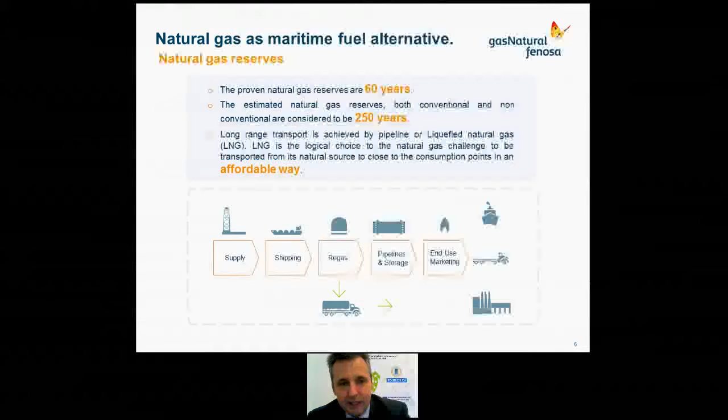So the first thing we want to address when one looks to consider fuels is: is this a fuel that has a long life? Is it a fuel that's going to be there to serve the investments that have to be made? Because when you're looking in the maritime sector, a boat has a long life of 30-40 years, and if we say to a boat owner the boat should be fueled by LNG or by natural gas or by compressed natural gas, the question he will ask is, well, will gas be available? I have a living to make, and I have to make sure that I can operate my boat. And the port infrastructures will say the same. Let's look at the case for natural gas.

There are today proven reserves of over 60 years, and many people believe that these reserves will go out beyond 250 years. And this is because of what people call the shale gas revolution, which many of you would have heard of in the USA, where people have found a way of extracting gas from shale formations where you blast open the rocks and you extract the gas from the pores. But there is a glut and a considerable quantity of gas.

When I was a youngster, people used to say that natural gas had the least reserves of all the fossil fuels. Today, that is not the case, and many believe there is far more natural gas available than petroleum. Also, the gas is widely available around the world, and we move it around, as I said before, in the form of liquefied natural gas, which is LNG. It is a way of moving the gas across the continents. And today, the full infrastructure exists for this movement. So, as a coming point to this course, natural gas is available and will continue to be available as a fuel.

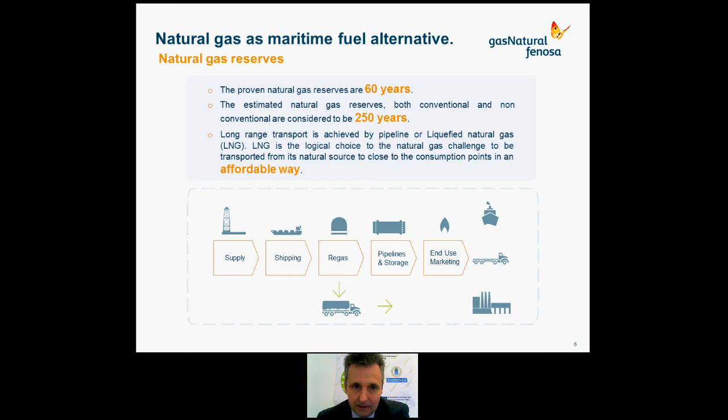So the first thing to point out is that natural gas from one country may well differ from natural gas from another country. And when you consider its use as a fuel, this is a concept that's slightly different to other fuels. Engine manufacturers are known to like standardized products. They know that a diesel, a petrol, a medium fuel oil, a heavy fuel oil has a minimum specification. This question is a bit more vague in the world of natural gas, and we tend to define it looking at factors called Wobbe index, which is really a calorific value of a gas, and a methane number, which, to give an understanding, is like the octane number of a fuel, and this varies.

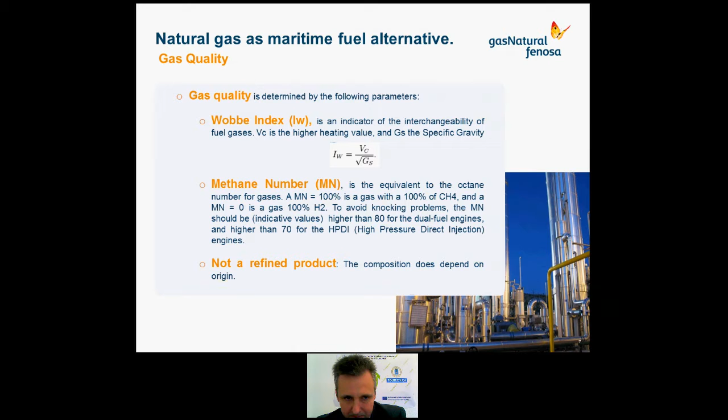Now, in the marine sector, everyone talks about LNG, which is liquefied natural gas. And all that we're talking about with liquefied natural gas is that 1 cubic meter of LNG is equivalent to just slightly less than 600 cubic meters of natural gas at atmospheric pressure. LNG is the most efficient way of maximizing the energy content of the gas in a fixed size container.

So in fuel transport, where you want to get as much energy content of the fuel within a confined volume, LNG represents the way to go forward. But it has its drawbacks, or its complications. First of all, it's a colourless, transparent, odourless liquid. So if there is a leak of LNG, you will not smell it.

Natural gas has no smell, but the gas that you receive in your houses is actually odorized with a sulfur-containing element. But in LNG, there is no odor added to the gas, so therefore you will not smell it. It's also a cryogenic liquid, and a cryogenic liquid brings a sort of complication and a certain set of risks that, when one handles it, you have to be aware of and take into consideration in the design of the infrastructures and installations.

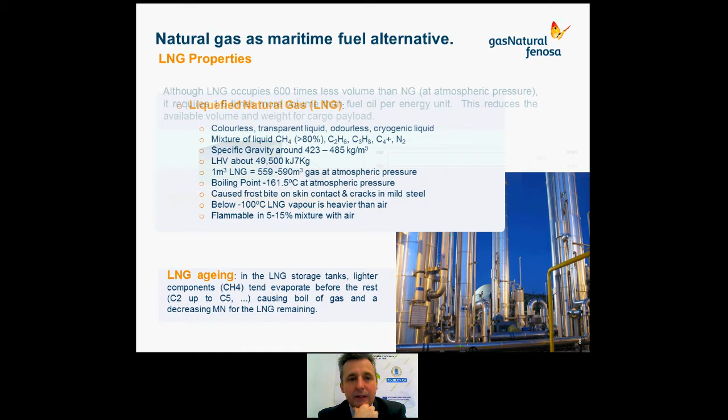I have said that LNG is a far more efficient way of putting a defined energy in a volume of natural gas, but one of its detriments is that, even though LNG is 600 times less volume than natural gas, on an energy basis, one equivalent of fuel oil requires 1.6 times the volume of LNG. It's not as dense, energetically speaking, as fuel oil. So when we look to introduce the fuel into transport sectors, we have to take into consideration that we will need more space to store the same amount of energy.

So what I want to say is that if the boat wants to go 1,000 kilometers or a truck wants to go 1,000 kilometers, we need 1.6 times the storage volume of fuel. And we're all aware that in many transport applications, volumes are restrictive, and this is a downside.

Also, when we look at maritime applications, even though I'm not going to talk about boats, from a safety and hazard identification point of view, it is most probable that tanks will be stored outside, not down in the hull of a boat; in the designs that they're making, they are stored outside. In the very, very rare event of a loss, the gas would disperse into the atmosphere. Not a good sign, but in the middle of the sea you wouldn't have an oil slick. But the tanks have to be stored outside, which does change a bit the weight distribution of boats, and that needs to be designed in.

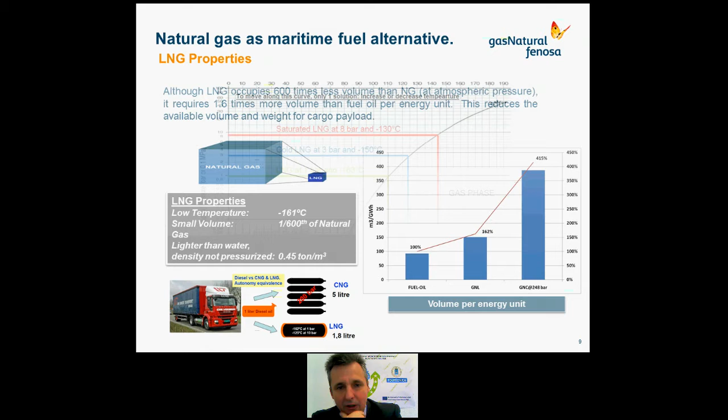This simply gives you the curve. You know, people talk about LNG, which we normally quote at -163 degrees C. at 1 bar. But some people talk about cold LNG, saturated LNG. It all depends where you are on the pressure curve. But simply speaking, put it into a container, and it will boil off with time. We play around this curve, and it's just simple basic physics.

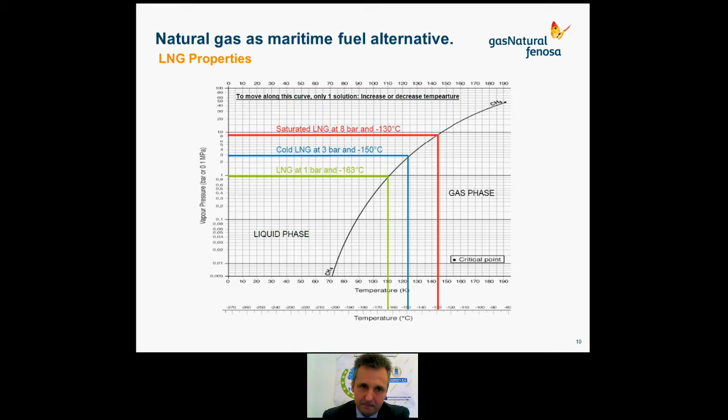So why I've started out saying it's a cryogenic liquid: you need more space to install it into a boat, you need to take safety precautions, and it's probably more only fit for new build boats. But why do we consider it the future for boats?

Well, I think you have to look at the environmental challenges facing the maritime sector. I'm sure in other talks people have put up graphs about ECAs and the reductions in sulfur and NOx in future legislation. Every time the legislation gets more strict, the existing boats on heavy fuel oil have to make changes, whether it's to a different fuel, or adding a catalyst, selective reduction, or fuel recycle. We believe natural gas has the composition to actually address these fuel issues, and it's not just in the boat.

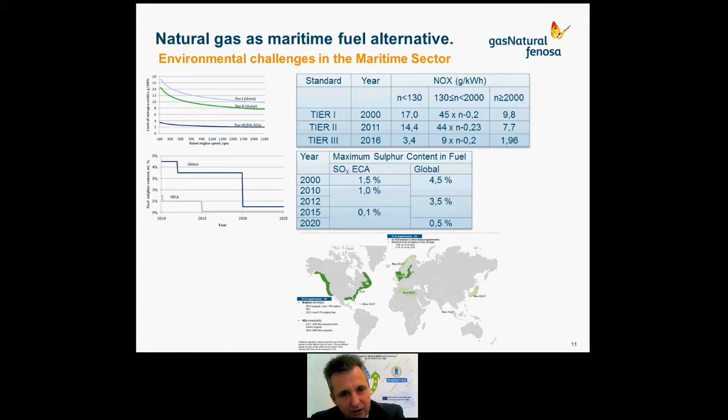The other thing I'd like to flag is that we often talk about the need to reduce environmental emissions in shipping, but we also need to reduce the emissions associated with ports. First and foremost, a port is a major economic hub of a city - it creates a lot of work, a lot of wealth, and there's heavy movement of goods. But when you look at the emissions, the port, although it generates this richness, is a big source of emissions in a city.

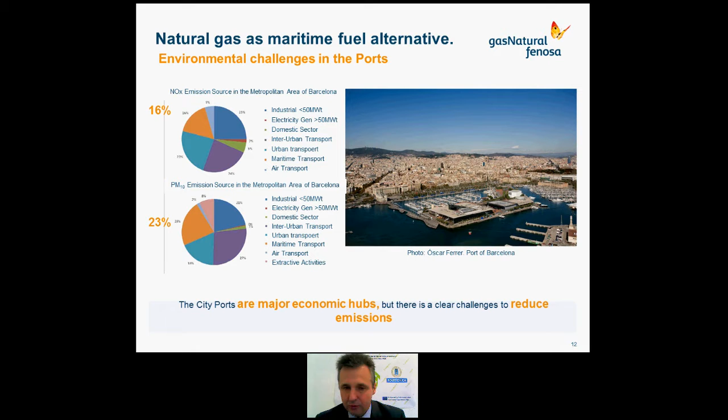So the driver to bring LNG into the marine sector is very much an environmental driver. The fuel is available today, the technology is available today, and a switch to LNG from HFO or even from medium fuel can result in immediate reductions in emissions of gases. We know it's still a thermal fuel, we know it still has a CO2 thermal footprint, but the technology is there today. And in a very large cruiser, there is no real other option today to make these reductions.

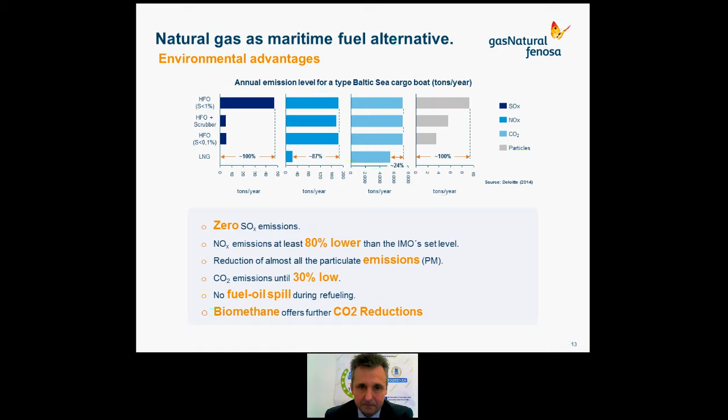So let's look at the options for a boat - this is really all I'm going to look at here. As we drive forward on emission reductions, we believe there are only 3 options. The first is a switch from heavy fuel oil to low sulfur marine gas oil, with some sort of NOx emission control, which we would imagine is exhaust gas removal, or recirculation, or selective catalytic reduction, which is the injection of urea - this adds complications in the maintenance of the boat.

You could also try to keep heavy fuel oil and add scrubbers, which is a SOx removal system, and then look at a very elaborated NOx emission removal. But all this adds expense required on the boat, adds space requirements, and adds considerably to the operational cost.

The other message we think is you can make the switch from gas to LNG, understanding its differences and the fact it's a cryogenic fuel, and we've got to develop the standards and develop the infrastructure that's not quite there today, and that will allow us to reduce the emissions.

When you look at the use of gas, let's be careful here, LNG is the storage medium. But as soon as energy comes out of the LNG tank, it passes through an evaporator and is changed to natural gas. The motors burn natural gas, not LNG, they burn gas.

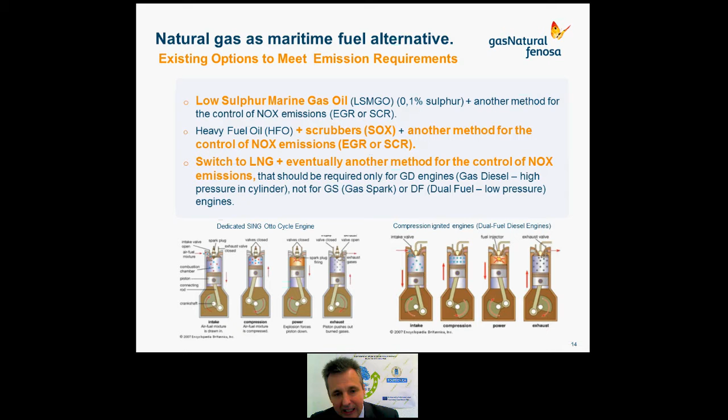Then you have the diesel cycle engines, where the diesel ignites by compression. Natural gas does not ignite by compression, so you need to put a bit of diesel in to get the ignition, and the rest natural gas—that's a dual fuel engine. But the gas engines exist.

Now, quickly looking at the options, I tried to resume them in a fair way in the table against the 3 options that we put there. LNG is on the top, and you can see, as far as we're concerned, it ticks all the boxes on the emissions, far more so than the other fronts. But there is a restriction on load capacity because, as I said, it's less dense than petrol, and less dense than the diesel equivalent. And the upfront investment cost is probably higher.

Gas engines are more expensive than diesel engines, put it into its context, and the infrastructure for LNG has to be developed because in the cryogenic part, you need special materials, you need double wall tubes to avoid losses, so the upfront costs are much higher. That's its downside.

For the operational cost, because it's a cleaner fuel, the maintenance costs will probably be lower. So we come to the table saying, if your driver is environmental performance, LNG is the optimum fuel, but we need to get around the very high investment cost.

We need to have the regulation, the support that permits boat owners that want to buy a boat for 30 years to be able to take this investment decision. We, as companies and port authorities, need to make the infrastructures available in port so that the boat owner can actually use it. So there's a lot to go.

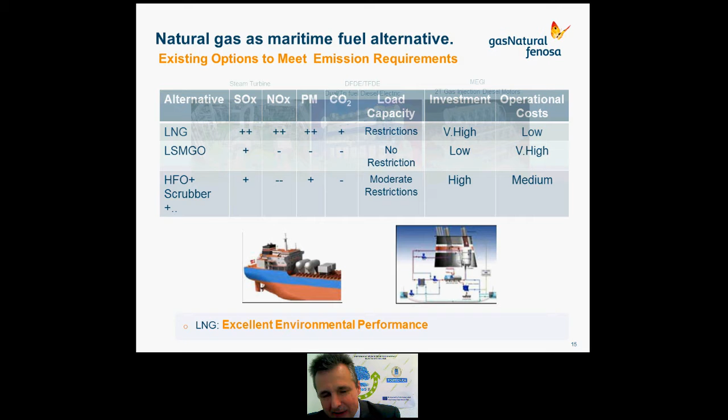How much does gas cost? Don't see the full question. Somebody's put up a question. Maybe we'll say—if it's about costs, I've got a slide about 2 or 3 further down that will get onto costs. I will read it for you. How much more does a gas engine cost relative to a diesel engine?

Depends, and that's—let me be conservative. A gas engine will be 25%, and the associated installation could well be 25 to 30% dearer in capital cost today. But gas engines aren't made on the same scale as diesel engines, so there could well be economies of scale. But if you look at the life cycle costs...

The fuel cost of natural gas is actually today cheaper than diesel. So we're in a scenario where the upfront costs are higher, the operational costs are lower. And over the term, there's been studies done by many organizations. They indicate for a new build boat, over a 30-year operational period, the life cycle cost is cheaper on an LNG boat than on a diesel boat.

However, let's put in a conservative nature—I come from a gas company, I want to promote gas, but the difference does reflect on the spread price between diesel, heavy fuel oil and natural gas. And we today know that the price for a barrel is very low. So therefore, the case for LNG is slightly more difficult economically. But over the years, LNG has proved to be cheaper than diesel, than petroleum products, and its price is a lot more stable, which makes the business case that way.

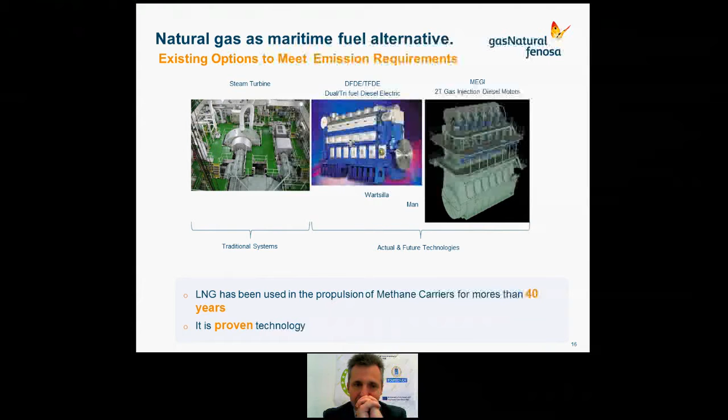All this interest has really led to people foreseeing a tremendous increase in LNG. The Cambridge Energy Research Associates, Lloyd's Register, and DNV have all set out that LNG will grow as a tremendous source. They've set out that there are now 50 ships operating on LNG, and they estimate that over the next 5 years that's going to jump up to 500-odd ships. So everyone believes the environment will be the key driver, and as there's an economic argument based on natural gas, it is a growing market and will become more common.

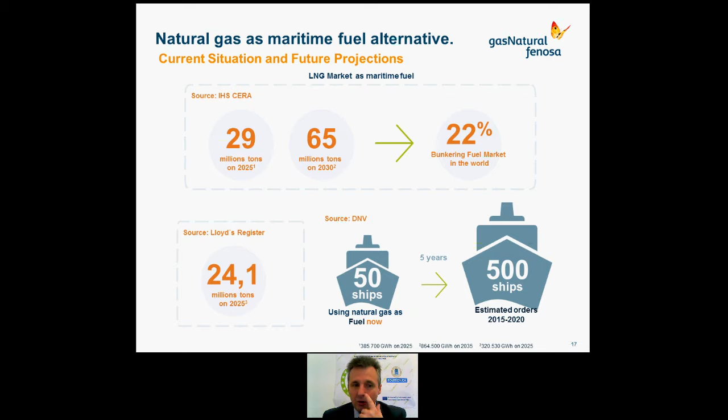In the next few slides, this is time for me to take a bit of a drink of water.

So let's take a break, take a pause, and now look at the port case. Let's not forget about the ports.

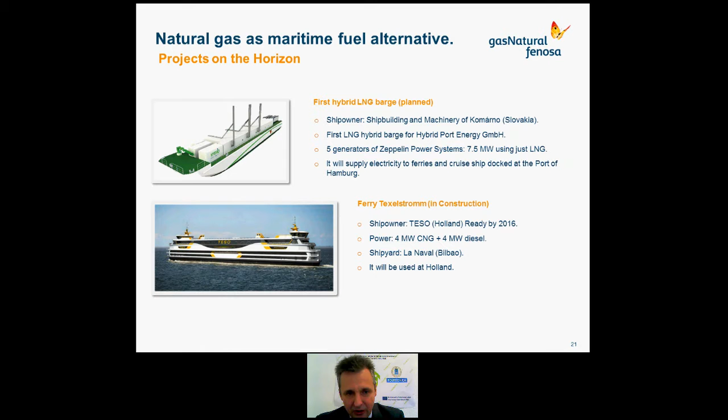On the ports, as I've said, there's also an area - if we're going to introduce LNG to refuel the boats in the port area, we also need to use this LNG, or inclusive CNG, compressed natural gas, in various infrastructure within the port: the cranes, the shuttle carriers, the straddle carriers, and the stacking cranes. All these elements are heavy diesel burners, heavy emitters of NOx and particulates, which are identified as a serious issue in port areas. These are all very good candidates to switch to gas if there's a supply of gas within that port.

So therefore, if in the future world ships operate on LNG, you need to supply LNG to the ships. LNG will be in the ports, and it will also be available to make an added impact and improve the environmental performance of the port infrastructure.

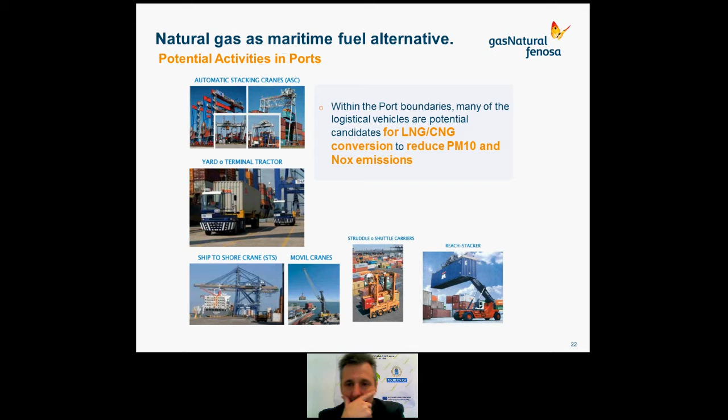We'll go back to the costs - I've seen many different cost cases. I put up this case, which was a study done by Deloitte; the references are at the back of the presentation. They looked at a retrofit of a ferry and set out a business case comparing the prices of LNG versus HFO, heavy fuel oil, or marine diesel oil, in terms of cost benefit.

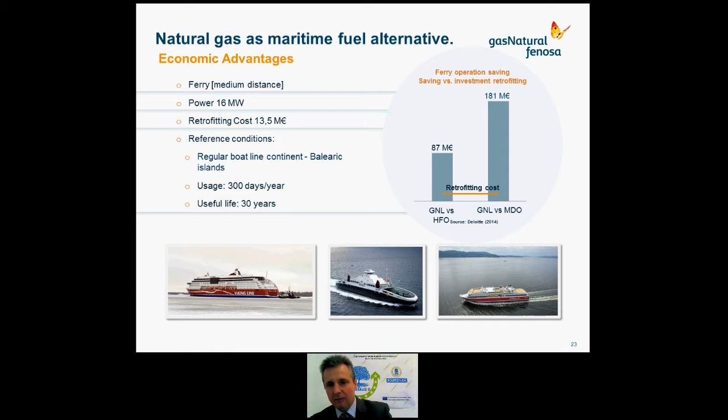I'll take this with a pinch of salt. I love the results because they show a tremendous advantage for LNG, but I'm also honest enough to say that savings over time will depend on the spread of fuel prices. The 2014 Deloitte study is very good - they set out the prices, and what they're really saying is that today LNG represents a much higher upfront cost but a much lower operating cost. Over a life cycle of 30 years, it is the cheaper option.

But we have to help boat owners have the confidence to take this bigger investment, and we have to ensure that in the ports where they operate, they're able to refuel their boat.

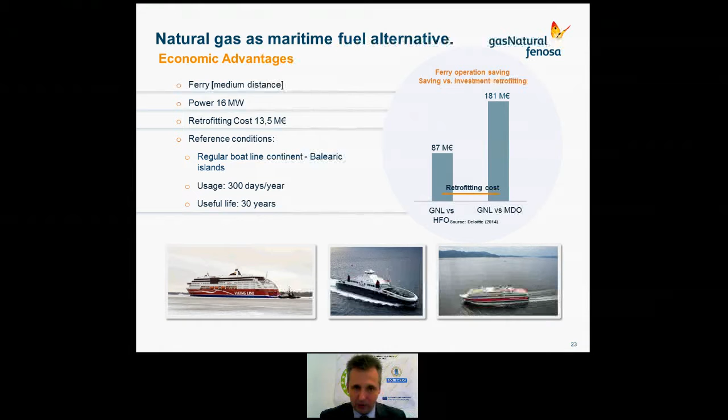I'll speak from the Spanish point of view here, if you permit me, because although I'm English, I'll speak from the Spanish point of view. I believe, or the feeling we're getting, being in the business, both at the European Union area and in the Spanish case, is that we detect increasing support for the use of LNG and CNG in transport.

The Alternative Fuel Directive sets out the requirement to install LNG refueling and bunkering, CNG refueling and bunkering. We see improved support because people believe it is a way of getting to this environmental improvement. It's also fairly cost effective because the life cycle costs are advantageous. So it's nearly a win-win case.

And we're detecting this political support. I think when organizations make their provisions of increasing market, this is also backed up by this environmental support.

So this is a bit of the sell, or the introduction, to the first part of the talk, to the first part of the natural gas system. It's a business starting off. There is political driver to take it, and we believe that if you look at studies from Deloitte, it could be very good for the economy. So this is setting out a case for natural gas. This is my introduction, and now I'm going to move on.

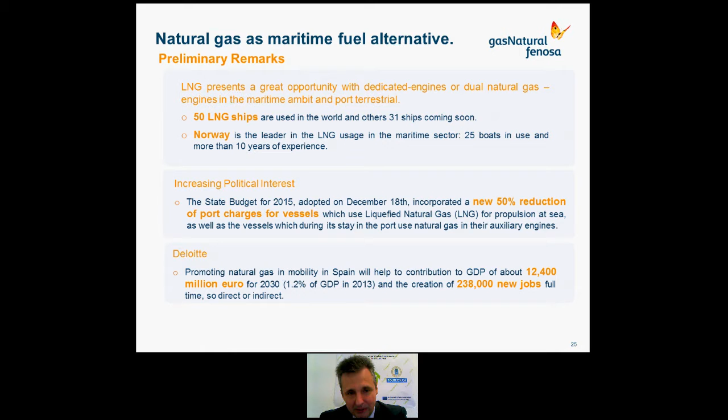I'm going to take a sip of water. No, sorry, I forgot I put this slide in.

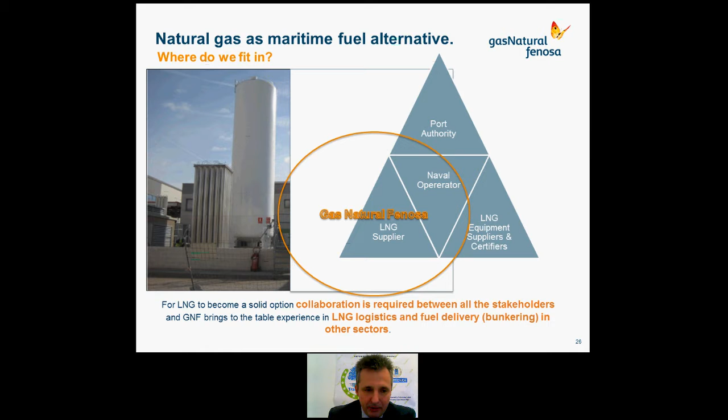So we bring experience to the case, and now I'm going to talk about the different aspects of bunkering, the next phase for thinking about ship bunkering.

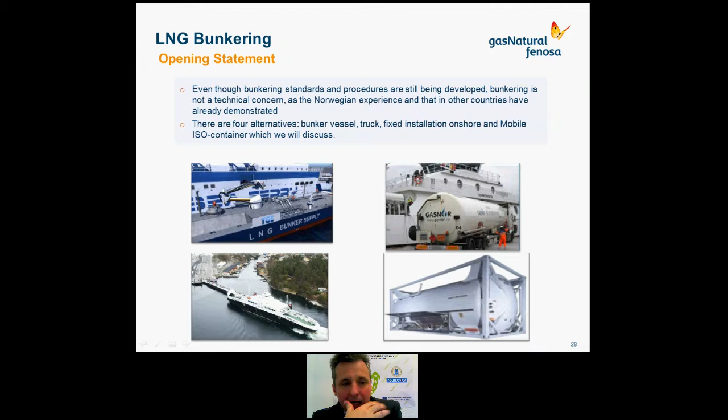Before we talk about bunkering, let's think about LNG in a port. Many ports already have regasification terminals, so they handle LNG. They receive LNG into this plant, which then feeds natural gas into the gas grid. Some ports will also be able to fill up tanker trucks with LNG, which we could then use for bunkering.

But let's be honest, these installations are huge. They're always located on the extreme part of the port, in an area where people don't go. They're well isolated, and it's an industrial concept.

If we now want to bring LNG as a fuel supply to boats, just think about it. Suddenly there's a ferry loading people, and we want to fill that up with LNG. We're going to have to bring the LNG to where the people are, to a place where there's public and port congestion.

When we look to do bunkering, we have to change our feeling about LNG. We're no longer in a regasification station handling huge amounts of LNG away from everybody, but isolated. We'll be handling smaller amounts of LNG in an area where there's public, goods, and boats. So we have to ensure the system is designed so there's no release of LNG or natural gas to the environment. That is critical.

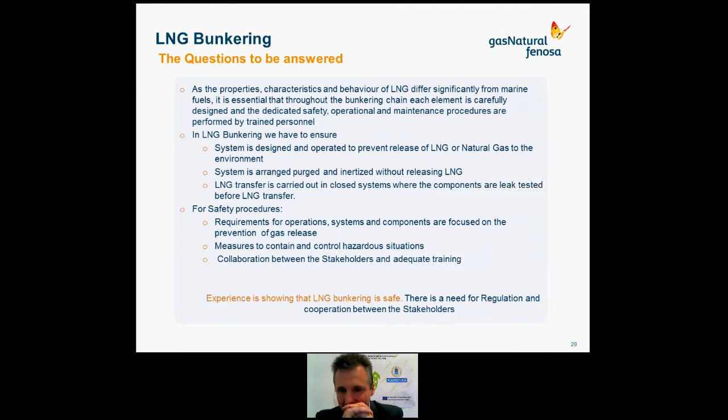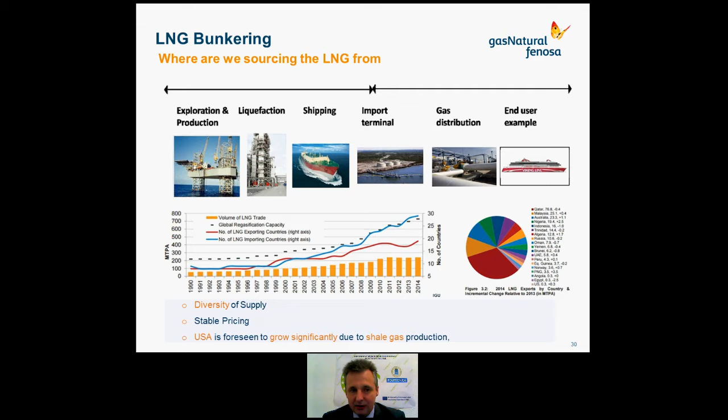We are the third country in the world after Japan and Korea with consumption of LNG. The majority of the natural gas that comes into Spain is LNG. And that is different to a lot of the Northern European countries that tend to receive their natural gas by these vast pipelines coming down from Norway, coming across from Russia, coming up from Turkey. So in Spain, we have a tremendous history of receiving LNG.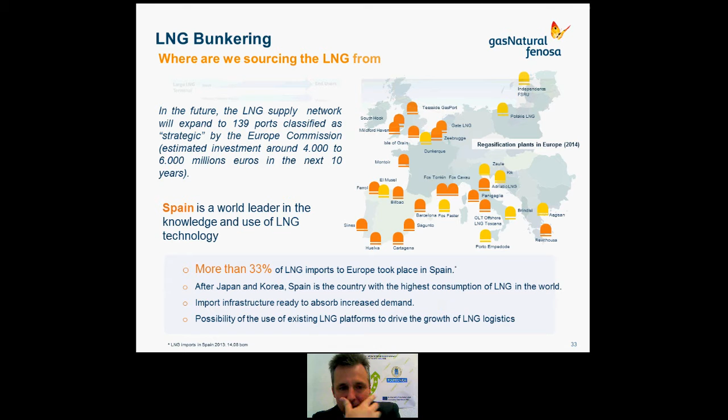And when we talk about this, the large scale are those big plants that are on the ports, but then we can go medium and we've got small scale. I just put the sizes so that you can understand at a later date, when people talk about large scale storage, medium scale, small scale, what we're talking about.

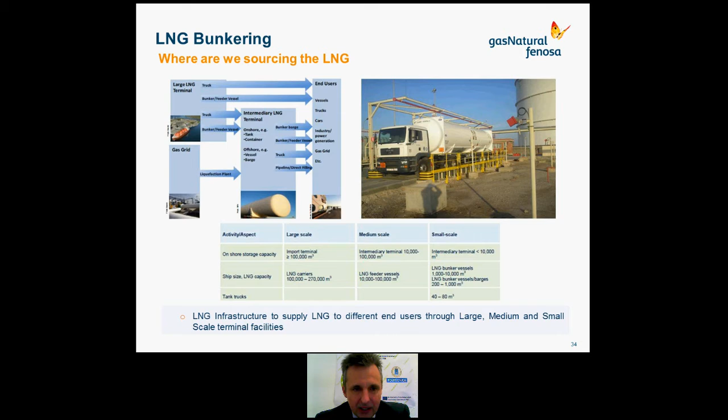So let's look at the four options that I say exist for LNG. And as a message, if there are a vast number of LNG ships, you need to refill them, and these are the four idealized ways of doing the bunkering: truck to ship, which is a tanker truck; ISO container, which is a standardized container that I'll talk about in a minute; ship to ship; or pipeline. I'm going to call it pipeline, but basically you'll have a satellite station, as I call it, and a pipeline to the boat.

First message. People talk about bunkering, people defend different options of bunkering. I believe, and we believe, that each one of those four bunkering, well, three of those four options, we take ISO containers out for the moment, have their advantages and their disadvantages. And depending on the needs of the boat, one of those options will be the ideal option.

And what one has to do is look at the boat that needs refueling, the port infrastructure and where it's going to be refueling, and then identify which is the best way to refuel that boat within these options. Each have their advantages, each have their disadvantages. There is no one solution, and the final solution will be a mix and match of those three. This looks a bit like it.

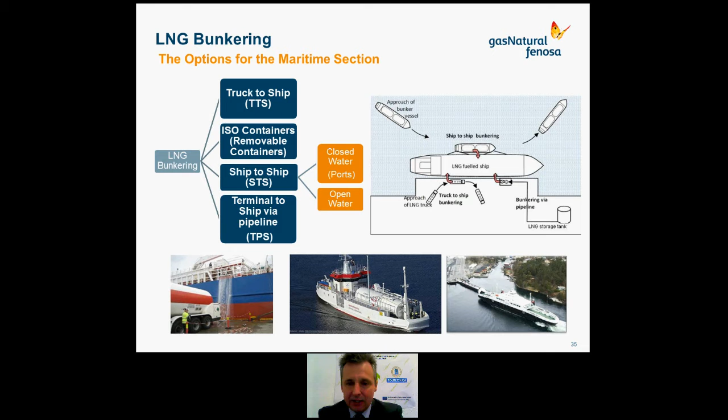If we take truck to ship, really truck to ship is these small road tankers. There's different figures quoted, but I would say that a typical truck that we move around Spain has around 48 cubic meters of usable LNG. So that's the amount of LNG you can offload. You never fully discharge an LNG tank. So for 48 cubic meters each tanker, you can deliver that to a boat. So it's ideal probably for situations that want smaller quantities of LNG, up to around 200 cubic meters. It depends on the timing you have for the LNG.

I mentioned ISO containers. ISO containers are modular containers mounted in a framework of standard size with standard connections. They're very much a plug and play type connection. You take a crane, you lift it on, and it plugs into place. It's probably not the idealized version because you need to have a crane or some sort of tractor to lift it up. There are questions, I think, on the legality from the shipping side for the connections of an ISO container, but it is an option.

We tend to, in the industry, believe that ISO containers are a great way to move LNG from, for instance, mainland Spain to the Canary Islands. We can fill the LNG up in Spain. In the Canary Islands, they've got no gas facilities, and we just ship it across. And these tanks are mounted on top of each other.

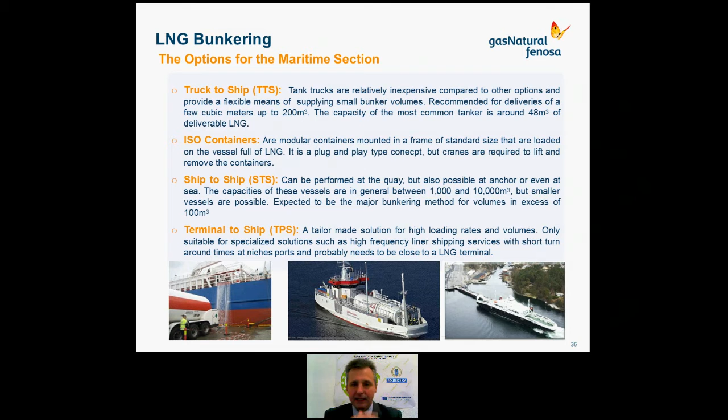The other thing, the truck to ship, the tank truck to ship. The tanker is very flexible. It's got a low operation cost. It's much cheaper to buy a tanker truck than to build a ship for LNG refueling and to build a process. But you only do small quantities and lower loading. But the table there looks at the different options.

And then what this next table does, from a source, it takes it to the question you've got to look at, which is the boat. You'll see that it sets out the table between 1 and 3, with 3 being unsuitable and 1 being most suitable. Obviously, the right refueling option for the boat depends on how much you need to refuel. The other question you have to ask yourselves is how quickly you can refuel.

We've had ferry owners coming to us saying they'd love to get into LNG, but they want to refuel 500 cubic meters of LNG in 3 hours. Simply, I've just told you that a tanker truck is 48 cubic meters. So that would be 10 tanker trucks that would have to pull up and refuel. That's not possible in 3 hours. So you need to adapt. You need to adapt your bunkering option to the time you have available and to the quantity of the fuel that goes out.

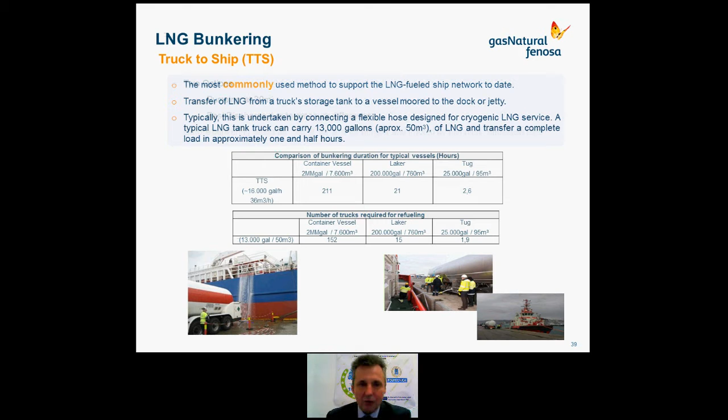If we look at the graph, on the right-hand side you have the LNG receiving vessel, the LNG tank in the boat. On the left-hand side, you have the LNG supply to the tank. So the first thing is you have to connect a flexible pipe between the two. They exist in various sizes with dry discharge connectors, and you connect it together. Here you'll see there are ESDs, which are emergency shutdown valves. So there's valving on the two sides.

We connect a supply line, which is the bottom line, and a vapor return line, which is the top line. The vapor return line is not in all cases, but we're going to assume we have one. So we make the connections. The first thing we have to do is inertize the tubing. We need to get the oxygen out of the pipework because gas and oxygen is not a very nice mixture, so we inertize the piping with nitrogen.

Then we need to cool the piping down. So we blow LNG vapor between the two to cool down the pipework. Therefore the LNG hose is double material tubing that can handle the cryogenic liquid, but it's also got to handle movement. When we fill up a boat, the trouble is the boat is going up and down. When I fill up a lorry, it's still, and it's very simple to refill. But here I have to design the tube so it can account for this.

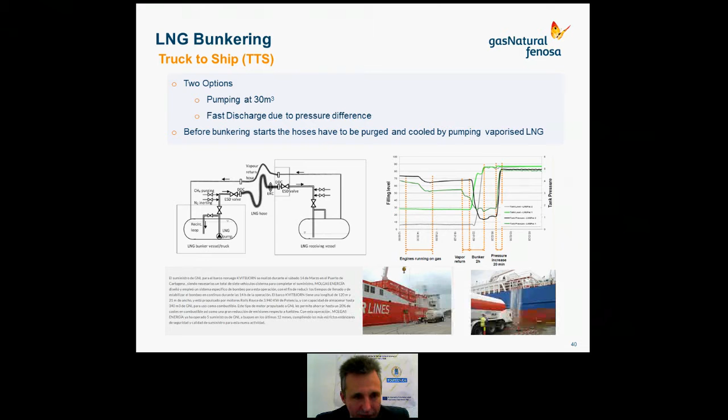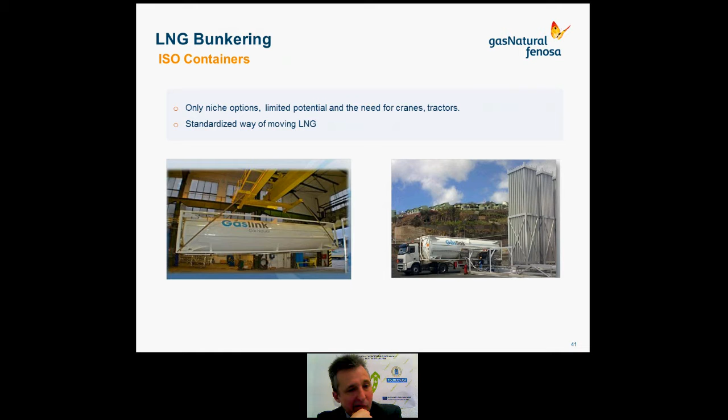There is a question of connecting and pre-connecting virtually on the boat, which is more complicated, rather than fueling being done from a connection at the side of the boat. The boat, it's the same concept as a tanker truck, but basically has more volume of LNG and bigger pumps.

It can deliver a lot more LNG. It needs to be bigger because the price of building one of these boats is a lot more than the price of buying a tanker truck, so you need a demand for the LNG. One of its great advantages, if you imagine a ferry ship docked up with people coming from the port, this boat would be on the other side, away from people, refilling.

Really, where we're actually working on this, we need to work on the regulation so that we know the right regulation is in place. We participate in the ISO committees, the International Standards Organization, and we're also participating in Spanish development. This is a key issue for us, because at the moment ports need these standards to know what they need to do for infrastructure and refueling.

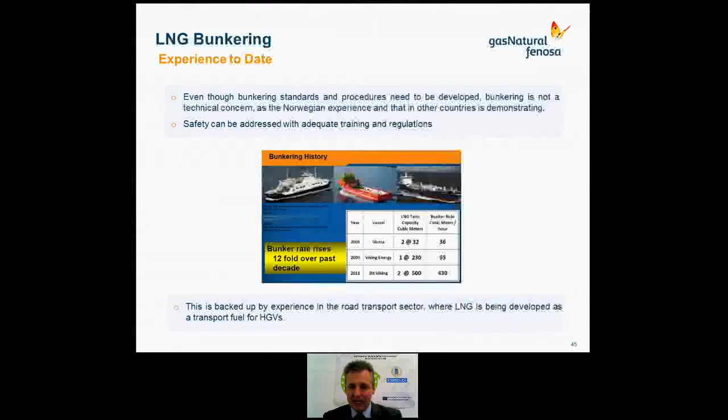The experience to date: bunkering has been increasing, and there's been no bad experience. It's been done well. You can do it.

Now, in the next slides, I'm going to change the tone completely, because my last comment is also backed up from the road transport. So what I'm going to do is flick to a project we did for heavy goods vehicles, and quickly show you what we did and show the refueling stations. Please take into mind the same process.

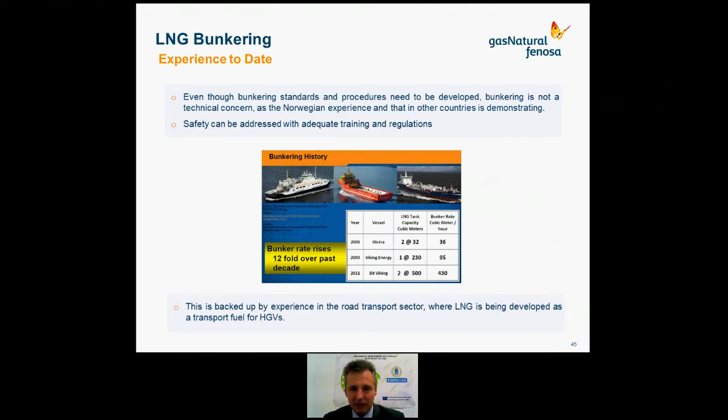This is a project we did - a European project with a partner where we set out to develop LNG as a fuel for heavy goods vehicles. It's a project we've now finished, where we put 4 public-use stations to fill a truck with LNG. So for the LNG trucks now in Spain, these are public stations that the driver could go to and refuel. Now, by being public, I'll put a caveat in on that statement.

Every driver that could use our stations had a card to authorize the refueling, and that card meant he or she had gone through the right training. But once they'd got their training certificate, they could use our stations, and they're self-service, meaning the driver of the lorry refuels as he would with diesel. So automatically think of it like we're doing a smaller scale form of bunkering on the road, and it's self-service.

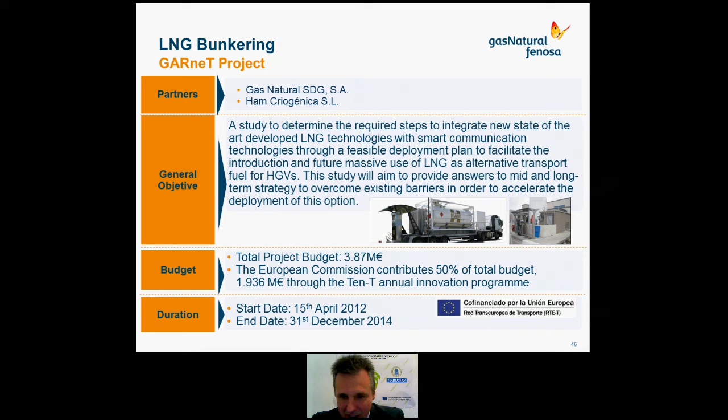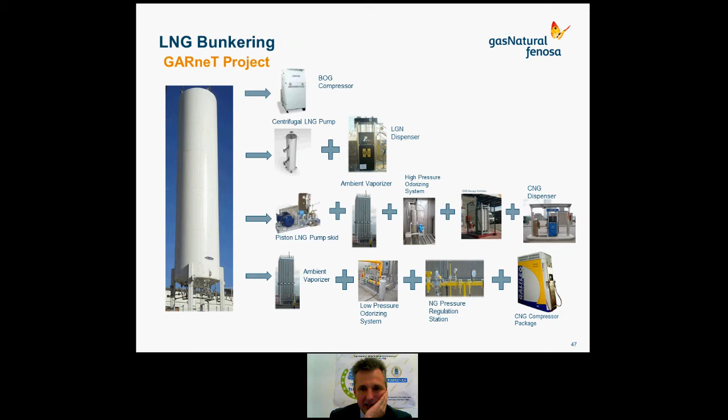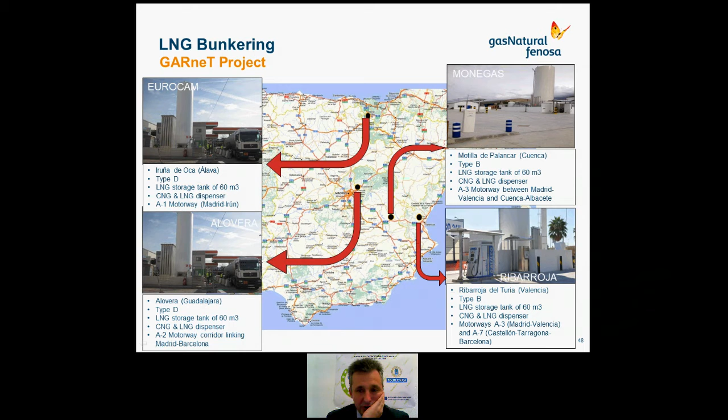They each have around a 60 cubic meter tank. If you look at the top left where it says Eurocam, you can see the tank, you can see the evaporator next door to it, the lorry, and he fills up. These 4 stations are in operation today.

We move LNG around Spain to deliver that to those stations. We also did mobile stations, like little tankers that you move to do bunkering, moved around Spain. The difference to a tank for naval bunkering is they have a fuel nozzle and a way of paying for your LNG on the back of it, like a petrol station - a removable petrol station. So we put out these stations and moved them around to supply the different drivers. And this is LNG.

You can see the LNG tanker, slightly small scale, but we moved it between Madrid and Valencia port. We actually did a project called Green Cranes in Valencia port with this tanker. It came back, we used the results, and it's now north of Madrid. So these are going around the road where people are, and they're refilling quite safely.

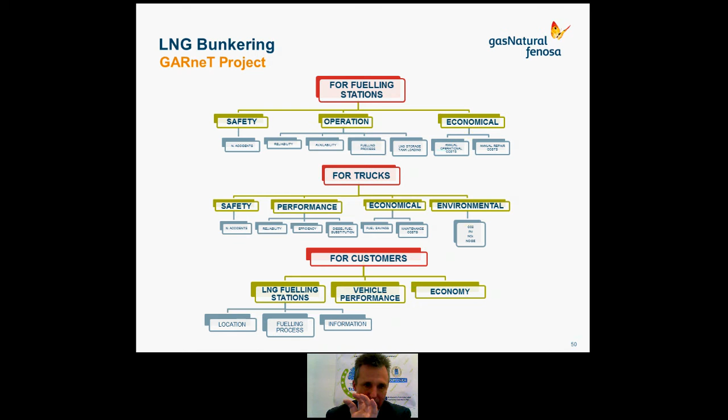What we did for the project, because the Commission asked us to develop and demonstrate their operation, they said they wanted us to show some KPIs, key performance indicators, for these stations. We developed a whole range of KPIs for the station, based on a fueling station point of view, a truck point of view, and a customer point of view. But I just want to look at the fueling station point of view.

And I'm going to look at the safety. We had no accidents in any of those stations, no accidents with drivers refueling. They were able to refuel in the time of working, and they were available. That's a very strong message - safe and available. So the technology is there.

We also looked at the fueling time compared to diesel, and the fueling time was as quick as diesel. Where it fell down a bit was what we call successful attempts to fill.

Now, when you refill one of these lorry stations, at the bottom you'll see a reference to the Spanish Gas Association. If you click on that or go to that site, there's a video from my company - you have to ignore the first 2 minutes of publicity from Gas Natural Fenosa, but it then shows somebody refueling a station. It shows a driver turning up, putting in his business card, which is his authorization to use the station because he's been trained.

He then goes and puts on a face mask and gloves because he's a cryogenic user. He has to earth the vehicle, so he has an earth cable that he connects to the chassis. He then has to connect the vapor return cable because there's no methane emissions. And then he connects what's called a JC Carter type connector in the US - he clicks in and connects to the vehicle. He presses a button, and 6-7 minutes later, it can be sooner in Murillo, it's full. And it just does the reverse process.

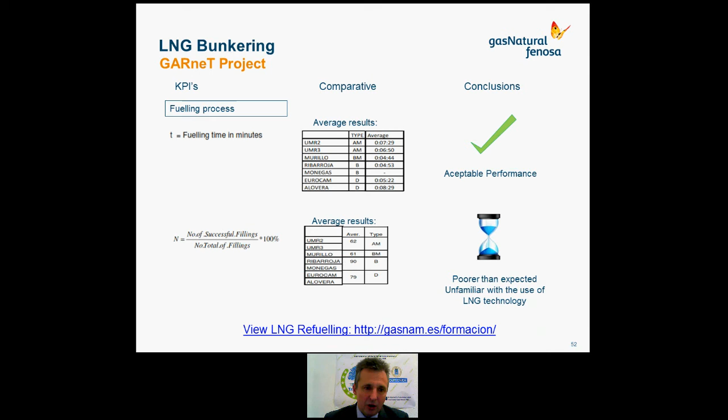But the upfront message - please take the upfront message - LNG is on the side of public motorways, it's growing on the side of public motorways, it's in trucks. There's a huge business in the US being owned and operated safely, which means you can bunker ships quite happily.

So final remarks about this. We need standards - not from our side, from a fuel supplier, but from the port side. At the moment, the port authorities have no standards to say how they will permit people to refuel LNG. They want to do it 2 meters away from the person, or there can be no people within 100 meters of the LNG refueling station.

So we need procedures and standards, which means that these are well contrasted and everyone can put them into place, and we need to show that they're cautious.

Upfront, different types of vessels will require different bunkering locations and solutions, depending on the tank, the time to refill, and that means there are options for all different locations. Different locations, different bunkering solutions. We've got to get the bunkering time quick, but it has to be safe.

And we also have to ensure, as I've argued strongly before, that there need to be no methane emissions. So the current that refuels the tank, the methane that gets evaporated when you start to cool, goes back to the tanker, and he is the owner of that methane. He has to take it and inject it into the gas grid or do something else. He cannot just emit it to the atmosphere.

What we're going to do is, where I've drawn the blue line there, we're lifting a motor on top, and we're lifting a small 30-meter cubed LNG tank that will supply the boat when it's manoeuvring in the port. We're even considering sending a tube line from the gas pipe to the boat when it's docked—that's something we'd like to try, but it's not the main object.

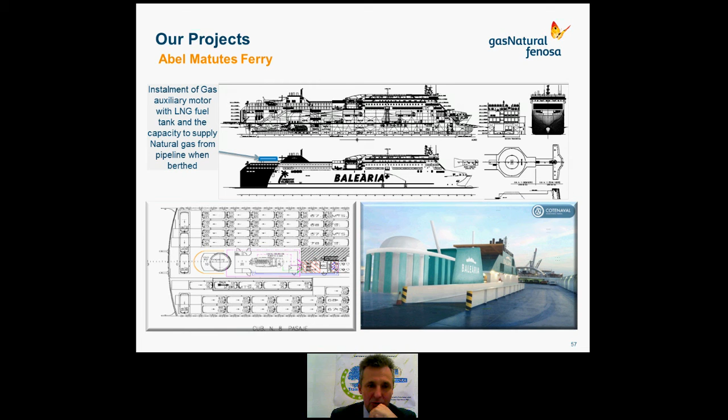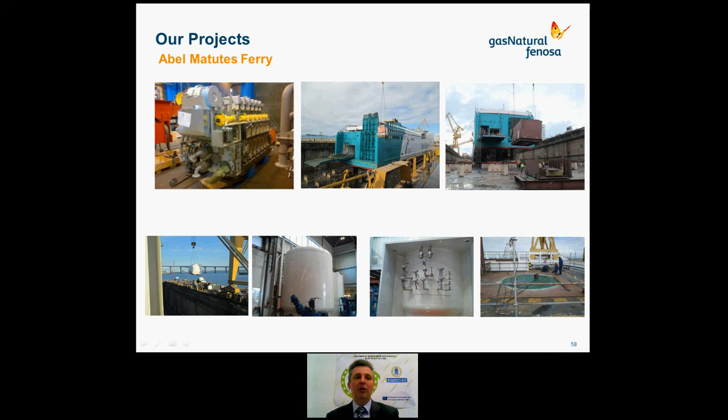But please note, it's not just the engine and the LNG. You've got to put the cooling, the seawater cooling loop in. You've got to put the fire prevention, ventilation, instrument air. All this is going on within this project. So it's a full and proper installation. It will be operated from the boat control room as any engine is, and we believe hopefully will contribute to a very positive outcome.

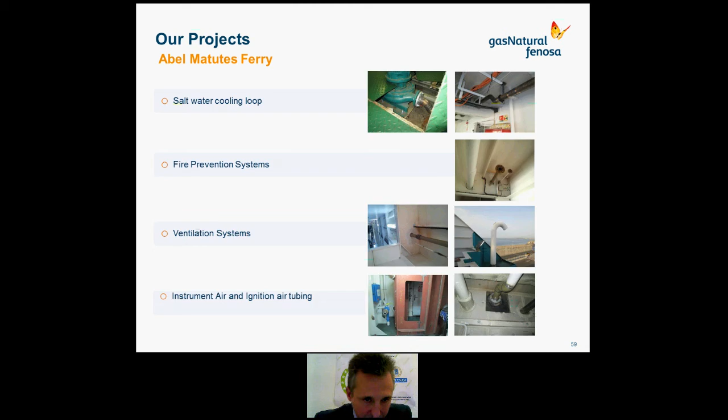LNG bunkering, we're going to do truck to ship, as I said, 30 meters cubed. A tanker truck is 48 meters cubed. You can refill that tank in 1 hour with a pump of 35 meters cubed.

But what we're doing here, which is slightly different, we're going to install on the port side what we call a bunkering facility. All the bunkering facility is, is that we're going to have a roll of the flexible tube stored there. We're going to have the fire prevention equipment. So the tanker will not need to have the tubing go by considerable height to refill the boat. That will actually be on the port side.

But we also have inertization, nitrogen supply, so that there are no methane losses and returns. So this is what we're building at the moment. We hope to get this going with the Barcelona project. It's fortunately now been supported this year by the CEF, the Connecting Europe Facility project, and hopefully this will give a good feeling and a good starter for LNG in the Mediterranean.

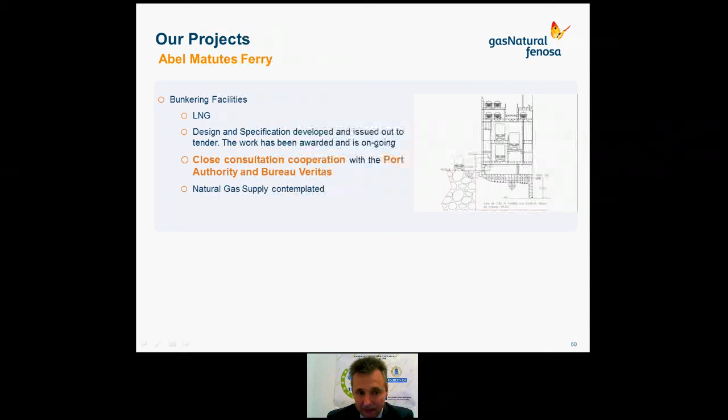Other things we're doing, let's not forget, obviously we've just started a project in Barcelona to convert a straddle carrier, one of these funny container cranes, to natural gas. And as a company, we're connecting in.